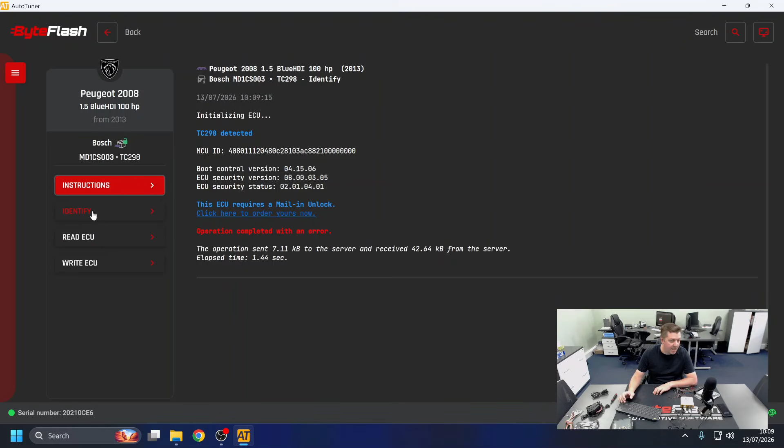Okay, so this still says that it requires a mail-in unlock, yet we know that this is unlocked by Flex and we could bench it. Let's go to the protocol for after a mail-in unlock, because maybe it doesn't check something that this one checks, and we'll do an identify again.

No. So, glitch unlocked with Flex. We know it reads and writes with Flex because we've done it in bench mode, but AutoTuner still wholeheartedly believes that this is needing to be unlocked with mail-in unlock, so that's an interesting one.

So next we will go for Kess3 and see if it does any better. Okay, so here we go again. I've now got Kess3 plugged into the computer. We'll give it some power as well, and we will wire the same glitch unlocked ECU up to Kess3 and see how that does.

Now, the wiring on Kess3 is slightly different in that you get this cable that plugs into the front that has all of the different connections on it, and then they're all labelled, and then you use bullets. It does keep the loose ones away from the ECU though, so I do still think it's better. It's not Flex, but it's better.

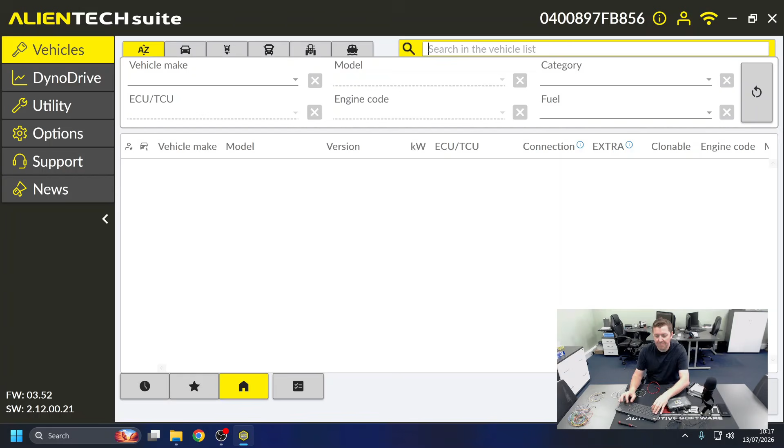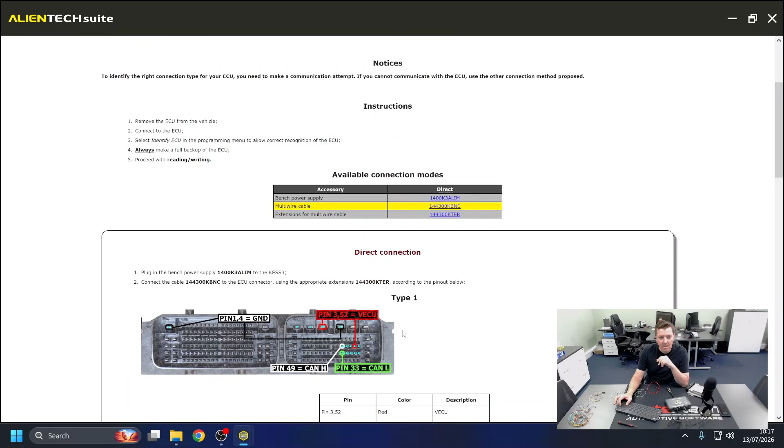So we will yet again say MD1CS003. Continue. The only method of connection is bench, so we'll click that, and then we will click to see the manual. That's a bit small, let's give a bit of a zoom in.

And let's wire this up the same. There is a power. These pinouts are going to be the same between the tools. So let's stick a power in that one and stick power there.

We will get a ground and a ground. So you just push the bullets together there, and then you've got similar sort of pins to the AutoTuner loom. Get an ignition, which goes to power. And that one goes there.

I've pinned the ECU out enough times now that I've kind of remembered exactly where everything goes, but it's always good to check. Never try and do a pin out from memory - that's how you run into issues and blown up ECUs.

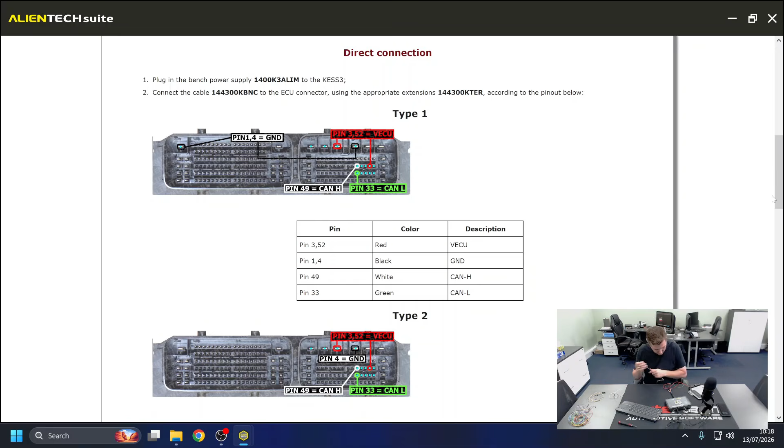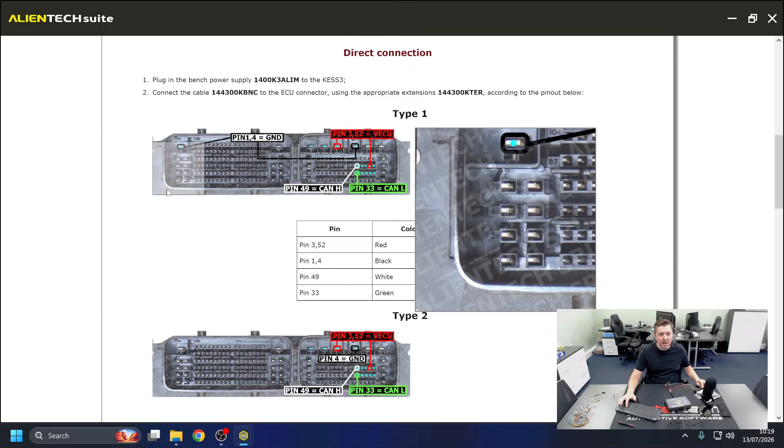1, 2, 3, 4, and then a can line. All these tools have different colours for the can lines, and it confuses me. So can high on Kess is a white one, which goes 2 along from that ignition feed. And then it does also give us an extra ground here, but we haven't had to use that on this ECU on Flex, so it's clearly not one that needs it, which is Kess's alternate pin out.

So we're just going to go with the alternate pin out first. See what it does. Click continue. No, we don't want to see the manual because we just did. Opening the protocol. Power's in, USB's in, we can see the tool. So identify ECU, let's see what it says.

Unrecognized ECU. ECU protected. Impossible to proceed with operations.

Just for completeness, let's add in that second ground. I don't see it making any difference whatsoever because it can clearly talk to the ECU, but for those people in the comments that are going to say you left a wire off, let's use the additional grounds that Alientech say to use.

Let's click identify ECU again. No, still protected. So Kess and AutoTuner at least are not able to realise that this has been unlocked by Flex. So that is something to bear in mind.

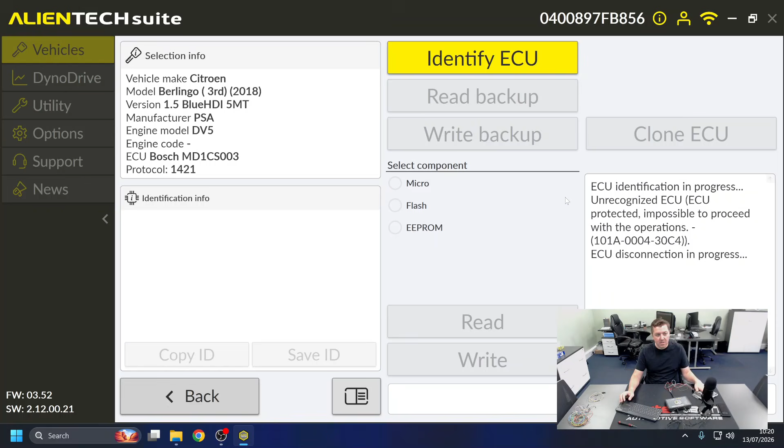So the takeaway there really is, if somebody unlocks this sort of ECU for you, at least MD1CS003 with the boot glitch mode in Flex, and you only have another tuning tool, at least AutoTuner or Kess, then you're still not going to be able to read and write this. If you have a Flex, but you're not comfortable doing this, or you only have the OBD and bench protocols and don't want to upgrade, then they can glitch this unlocked for you, and the normal bench protocol will be available for you in Flex, and that will work.

We've had that confirmed by Magic Motorsport, which is why we're now offering a service where we'll glitch unlock them with Flex and then send them back to an installer that only has OBD and bench, and then they'll be able to read and write them and do whatever tuning they want, use the file service, etc. But something to bear in mind if you're sending an ECU for somebody to glitch and you don't have a Flex, you, at least with these two tools that I have to hand to check here in the office, it's not something that's then just going to work.